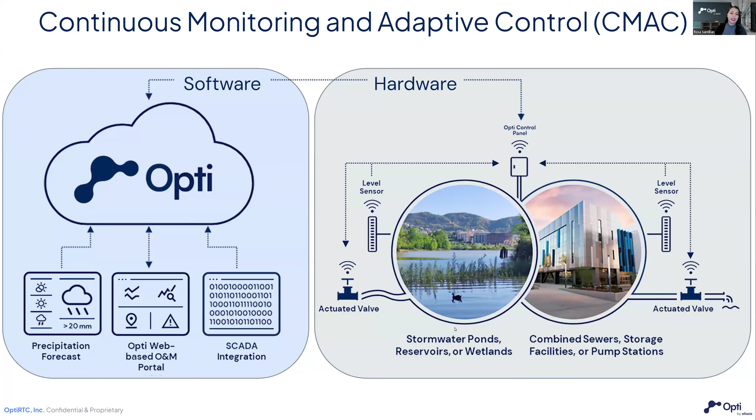And of course, we can't move on without acknowledging the challenges with the passive or traditional approaches. I come from a background in civil site design, and a big part of this was, of course, limited resources and budget, right? That's always super important. Adapting to a changing environment, we just talked about that. And once that punch list is a done deal, then there's also operation and maintenance that happens.

Stream buffers, I dealt with a lot of those as well, where you might have plenty of space, but then you have those 75-foot, 50-foot buffers that you just cannot disturb. Erosion control is another big deal. Let's not get into cost and disruptions, right?

That's another big topic. And then how do you know that your system is actually functioning the way that it was designed to function? You put it in the ground, and we all trust in our abilities to know that this system is going to be functioning the way it was designed for the life and safety of those around the system. So CMAC can certainly help with all these areas and potentially even more.

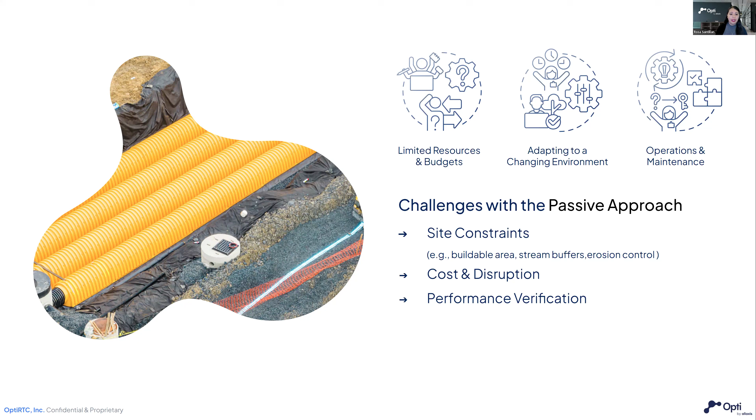It's, of course, a very animated graphical representation of this. So you have your valve that's controlling open, close. This could be butterfly valves or slide gates. You have your actuator. And all of this is hardwired into our control panel that we do have solar or line power. And then the control panel is communicating with the OptiCloud via cellular network in real time, as well as receiving information from forecasts. With all of that, the user can use a web-based dashboard to see real-time information as to how the system is functioning.

So again, going back to how is the system performing? And another beautiful thing about this system with CMAC is that it's fully adjustable. So we do have an optimization period, but then for the life of the project, the system can be adjusted again to that changing environment, whether it's above ground or underground, it works exactly the same way.

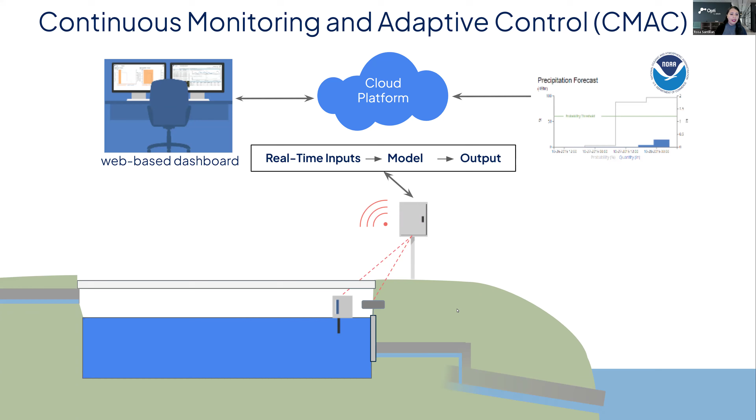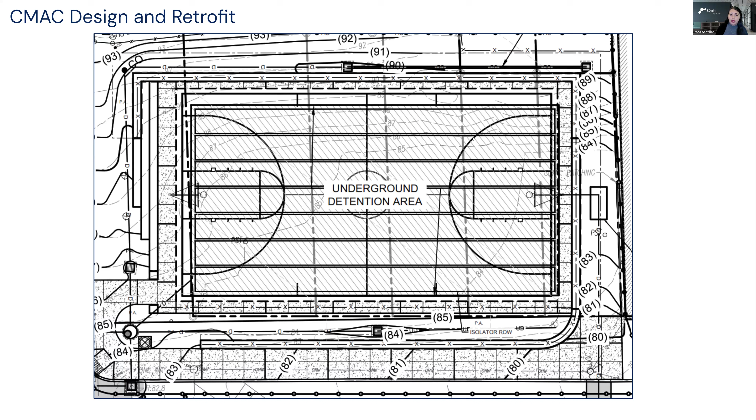This is a good example of areas where we typically see underground detention systems. This is directly from one of our ongoing projects where you see that there is a sports court. And underneath here, we have a series of chamber systems. This is an ADS StormTech MC 3500. And this can be connected, as with any other system, to your outlet control structure. And that is where we integrate CMAC.

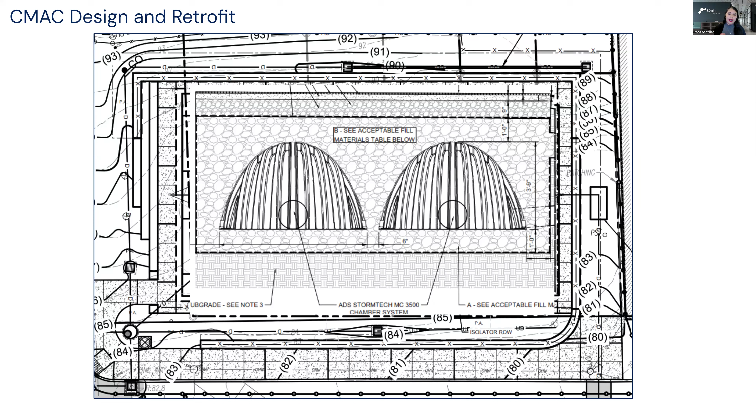So on the next slide, you'll see a very, very high-level annotation and markups, equivalent to maybe about a 10% design drawing set, where we're still trying to figure out where everything is going. We're still trying to figure out pipe sizing, where the outlet control structure will be placed, the sizing, all of that good stuff. So we work with the engineer of record to identify the best possible area for the control panel. Remember that that's part of the hardware. Where are the conduits coming and going from?

In this case, this project is a line power system, so we will be connecting to a nearby power utility cable there. So we work with the engineer of record just to lay everything out. And then as the project moves from 10%, 30%, 90%, up to 100% design drawings, it's fully customizable in terms of having certified hardware, but in terms of where the location of this hardware is best suited for the site.

In this particular instance, talking about constraints, we did find that the property line is about here. You can see my cursor there. And then we have a building that is pretty close to that property line. And then we have a wall that's going right up against there. Talk about site constraints, right? Everything will be housed completely in the underground outlet control structure. And then the only thing you'll see is a control panel.

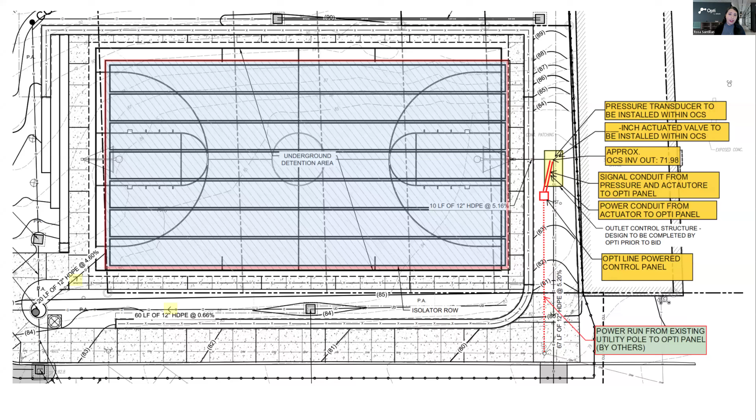And so again, we work with the design as it changes, as it shifts. If there's a change of scope, then we are part of that process the entire way. So that was a chamber system.

But if you can see here, again, this is a very graphical representation of where the Opti control panel and the valve would be installed. Here, you can't really see the leader there, but this is a 4-inch orifice. In the valve itself, we match it to whatever the orifice size is for the project. This is a vault system that can be used either for irrigation purposes, for attenuating and minimizing discharge, in a variety of other reasons that maybe we want to contain rather than infiltrate.

And we'll be talking about that more so when I hand it over to Dayton. He talks about the case study. But yeah, so you can house the entire system inside of the vault itself, and you'll never even know it's there. The conduits will come out and then they will connect to the control panel that many times is within the mechanical room where you house your water meters and whatnot. So the actual control panel can be housed inside of the mechanical room. No issues at all. We'll just find the placement for the antenna to make sure that we are properly sending and receiving signals from the antenna itself.

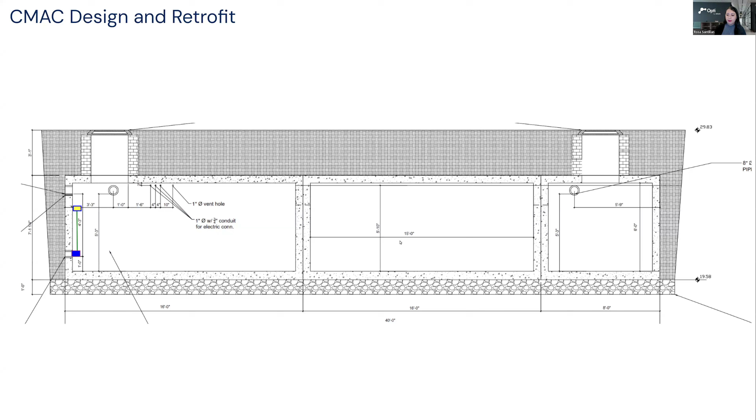And then here, I really like this representation because you can see that everything is there. You've got your valve, your stem, your actuator, and then it's just sending the signal to the cloud while on the surface level, you have all this beautiful usable space. And a lot of municipalities actually give you credit for using green infrastructure and maybe pervious and permeable pavers that infiltrate into your system depending on your design. But the Opti system itself is made out of those components: the valve, the stem, the actuator. The pressure transducer will probably be housed on this side of the weir wall. And then from there, everything is connected to the control panel and conduit can run wherever you need that to be.

Opti also, as you may have seen in previous webinars, supports our partners and customers with a set of design drawings. We're able to provide these in PDFs or CAD files as well so that you can customize your outlet control structure. And we'll work with you to verify that the setting is correct, that you're using the right dimensions, that we have the information needed to integrate the control settings, such as any elevations, if you have any weir walls, overflow weirs, any constraints within the outlet control structure. We'll work through all of that.

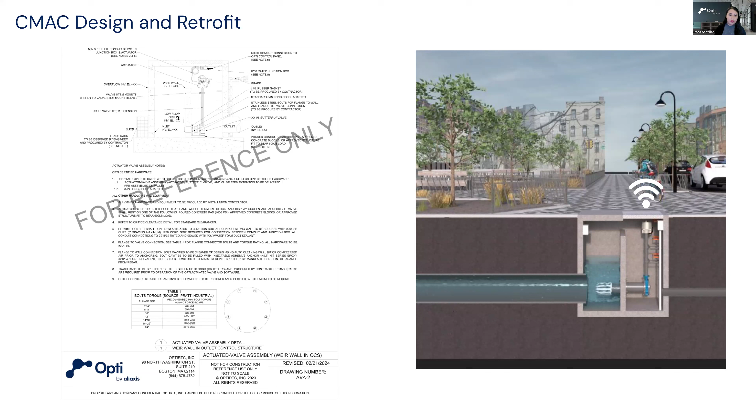And then this is one of my favorite parts. I'm not sure if anybody here in attendance was at CASQA just last week, but I think this is a national conversation that is happening around grants. So there is a lot of effort to provide grants at the municipality level, whether that's city, county, state. There's a lot of grants out there to be used. And during CASQA, we talked a lot about having multiple benefits, right? Stacking your benefits and having the best chance of getting those funds allocated for your project. And Opti can help you with that. Opti can be used for a multitude of benefits all at once.

And you'll see in this case study shortly, we talked about flood mitigation, hydromodification to reduce some of those erosive flows. That was such a big deal for that project. Water quality. You can also have other projects that might integrate water conservation, and the list goes on. So as we're moving into this era of more focus on stormwater management and having all of these wonderful grants available for project use, let's brainstorm and see how Opti can help you hit as many of those stacked benefits as possible when applying for grants.

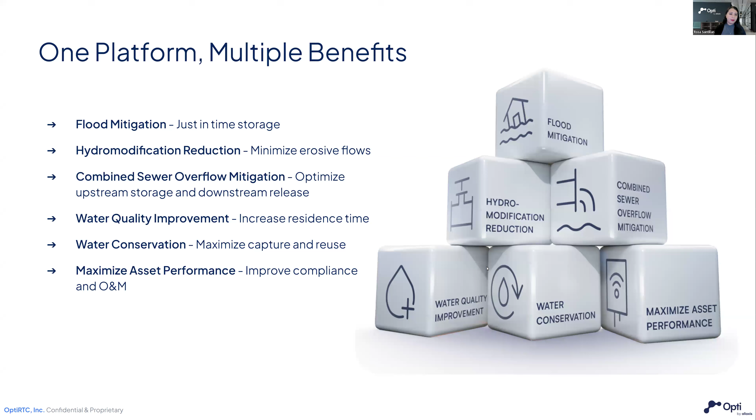And then here's a flow chart. Again, you may have seen this as well, but just want to reiterate basically the life cycle of how we get where we are. We identify the challenges, again, those stacked benefits. What are the challenges? And for every challenge, there's an objective. And then we can also identify some of the KPIs that go with that. We select the behavior on the control settings that are the inner workings of the system, the actual software. We also establish those key parameters. How do you want the system to function? And Dayton will go more into detail on that for this particular case study. But do you want the system to hold the stormwater for a certain amount of time, 4 hours, 5 hours, 24 hours, whatever that is?

And then slowly release for water quality purposes. Whatever that is, we identify those KPIs during this stage, and then we go into H&H model and simulation, which Kenneth Yu from Opti, our hydroinformatic engineer, went into a lot of detail on in seminar number 2. So if you're interested in learning more about these simulations, I refer you over to that seminar, and he goes into really, really good detail. And if you have any questions, please feel free to reach out and see how we can partner with any models that you may already have in your design.

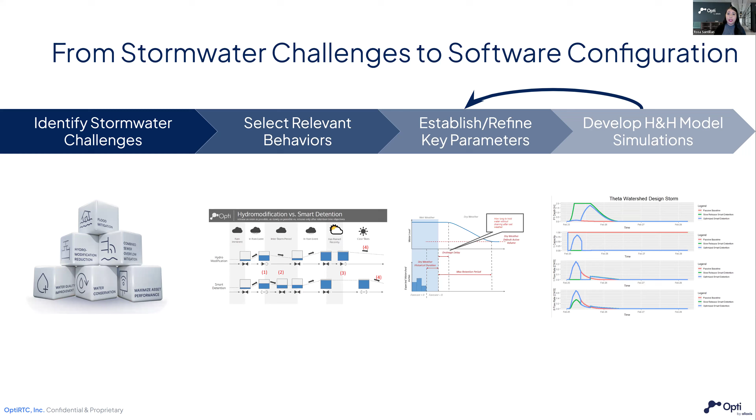And then finally, top priority here is security, right? How do we make sure that our systems are safe, that they are reliable? And of course, redundancy, right? That's part of every engineering project. We make sure that the civil design is there. So we do not necessarily replace, but rather enhance passive overflow that's been designed by the engineer of record during a passive system. We simply enhance the design.

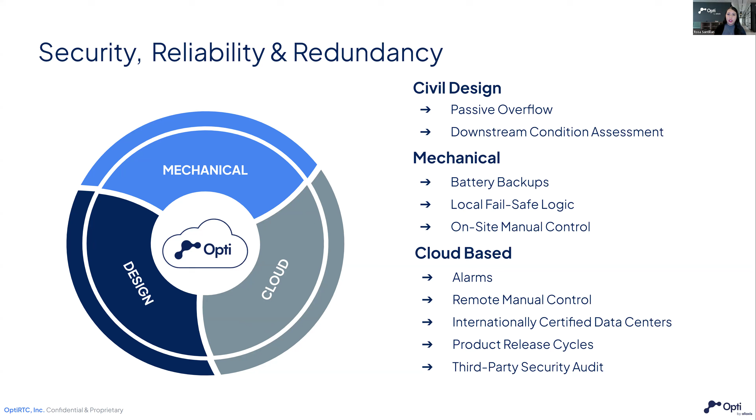We also do downstream condition assessment, and we can do that during the feasibility assessment. We provide mechanical and cloud-based security as well, and we can go into more detail on that in future seminars. But we just want to make sure that we are providing our partners, our customers, and the end user with that peace of mind that we do have a set of security, reliability, and redundancy practices in place.

And then, of course, we talk about this every time, but we are growing as more and more projects are coming, but we're already in over 300 different deployments. We are backed up by a variety of different regulatory approvals. And again, going based on those grants that we talked about during CASQA and other national conferences, we are part of that conversation. We are at the table learning more about how we can support these efforts as a whole. So we're currently in 37 states and growing. So love to hear about where your projects are.

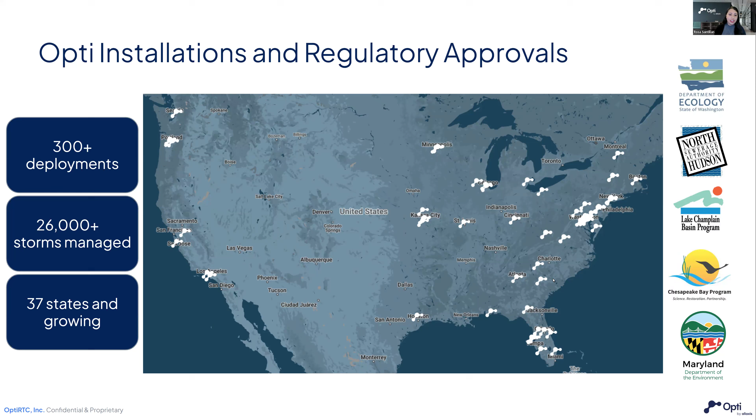And yeah, let's talk. Partnering for success is also our top tier priority here, right? We partner with you so that you can provide your local expertise. You know your state, you know your design. Let's talk, let's brainstorm, let's share models and design. And we also provide you with a lot of support from start to finish, and even through O&M, operations and maintenance, with our Opti technology. And then together we can just work towards that common goal of providing clean, water resilient communities with that peace of mind.

And with that, I'm going to go ahead and pass it over to Dayton, where he can talk more about the Sand River Stormwater Project that has been a wonderful success. And I'm sure there's a lot of you here in attendance that might have had some part to play. So thank you, everyone. I'll go ahead and pass it over to Jason and Dayton for this.

Great. Thanks, Rosa. Appreciate it. Jason, good to see you. Welcome. Good to see you again, Dayton. It's been a while. Yeah. Appreciate you joining us. I'm excited to talk about this project. Excited to talk about it with you.

This is one of my favorite Opti projects that I've ever done. I've done a good number of projects over the last 7 years or so. Definitely one of my favorites for a couple of reasons. One, you put together a great project team. They're very smart, capable, enthusiastic. Two, we have some slightly complex control logic, which you'll remember in the design process made this a really fun project to do. And three, it just provides a ton of value for the community. And you're close to this, you're local, you've seen a lot of this. So I'm excited to jump into it. We'll share with the community a little bit about the project, how we implemented it, and have a good conversation. Great.

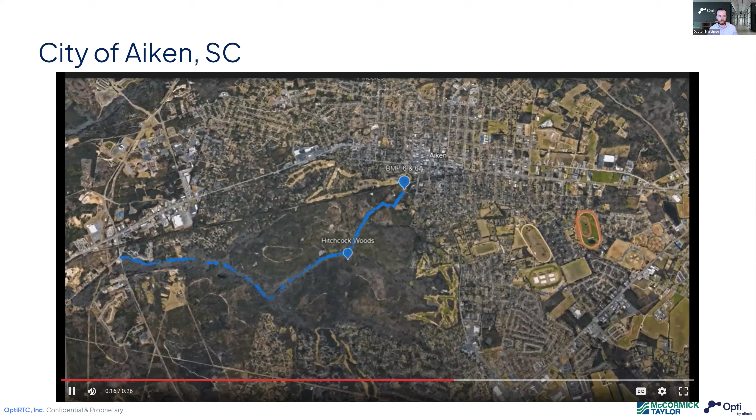The equestrian community, still today, they use this amenity, Hitchcock Woods, significantly. They spend their time hiking, riding horses in there, and it has running through it, which you can see, the Sand River. So Hitchcock Woods, the Sand River. Here's a little sneak peek at where the project we're going to talk about today is. It's right at the headwaters of the Sand River, right where basically the urban downtown area meets up with Hitchcock Woods.

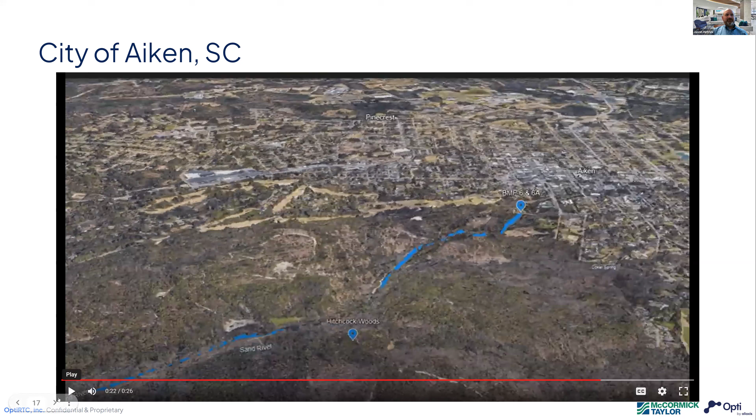Anything else you want to add about the city? No, you nailed it on the head. Aiken was born as a winter playground for the New York City elite. They would bring their horses and friends down for the winter and go do fox hunts and equestrian activities. And also, it was a major hub in the railroad system from Savannah and Charleston up to the inland area. So kind of a dual birth to Aiken, the railroad and the equestrian community, and Hitchcock Woods is a huge gem of the city of Aiken, and was kind of the impetus on this project on preserving the jewel that's in their backyard.

So let's talk a little bit about that impetus real quick. So the Sand River, which used to be, as I understand it, a small, narrow river that someone could hop from one side to the next. Is that right? Correct. Yeah. So the gentleman there in the middle, his name's Bennett. He grew up in the woods, and he manages the woods. And he remembers as a child, not that long ago, that you could just hop over the Sand River. It was a little babbling brook, creek. Some of the older members of the woods would just skip over it, and then the last 30, dating myself here, probably the last 50 years, the acceleration of erosion has just been exponential due to the increased impervious area within the 1,200 acre watershed.

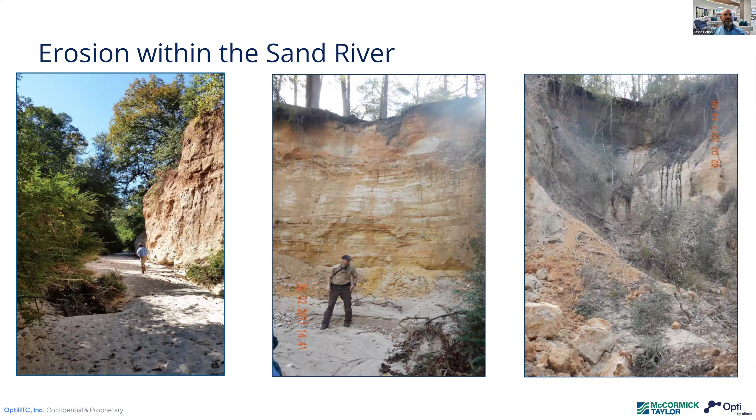I will say some of the impervious area and some of the pervious area upstream is actually pretty exciting, Nick. They've got their nice downtown walkway, their sort of outdoor shops and restaurants. It's a very fun place to be, but I know it carries with it some consequences. Correct, and actually, the runoff would probably be 1,000 times worse if it wasn't for Aiken's Parkway system. They have large, broad boulevards with treed and grass medians, a lot of tree canopy in the watershed, which does help. But as you can see from these pictures, it doesn't do enough in mitigating the runoff from such an urban area.

But Aiken and the community there, they decided to do something about this, right? So they formed the Sand River Stormwater Task Force, which you were a key part of. Correct. Just prior to our involvement, Mayor Osmond in 2016 formed the City of Aiken Stormwater Task Force, which was comprised of members from the Hitchcock Woods Foundation, elected city officials, city DPW folks, and also residents of the community. Aiken is special in the fact that it sits adjacent to the Savannah River nuclear site, so it has a good clientele of engineers and scientists that call Aiken home, and those folks were part of this task force. So we were able to have really constructive scientific dialogues in developing the ultimate strategy to address the erosion within the river. And that was the big focus, right? What can be done to address that erosion.

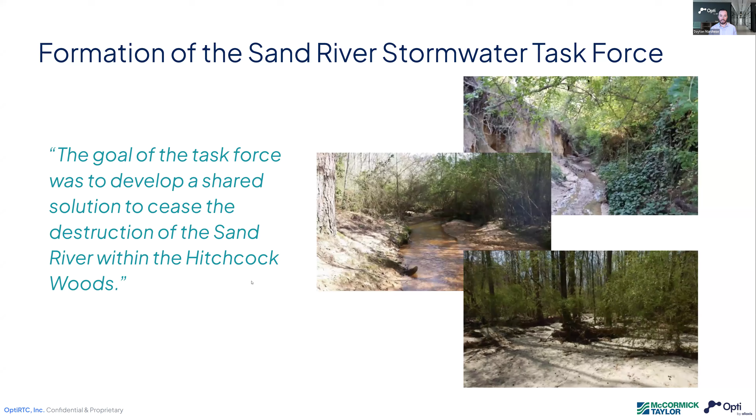And McCormick Taylor was deeply involved in the technical side, right? You did the modeling for this, you broke down the city into these different sub-watersheds. Correct. Yeah. So the 1,200 acres that drain to the headwaters of Sand River arrive at the Sand River in two large sub basins. You can see here, one to the west side of the city, that is the historic downtown area that gets to the Sand River very quickly. And then to the east side of the city, there is a much larger, broader drainage area that consists of several sub basins that makes its way there.

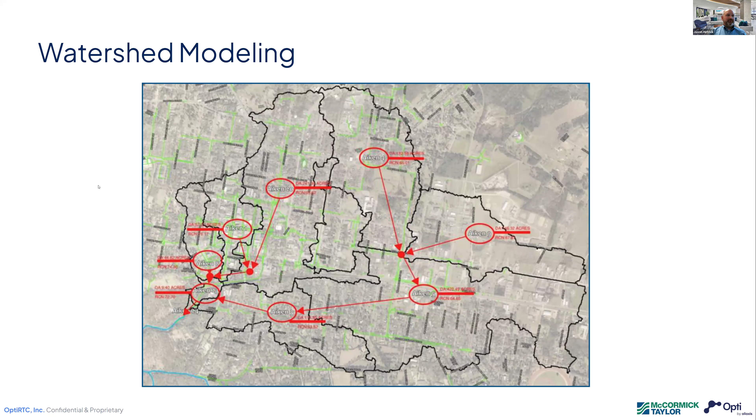And we did traditional hydrology for the basins using TR20 to determine what the runoff was coming into the area, and also what it would be if Aiken wasn't there, if it was just the pine forest and the sand hills of 200 or 250 years ago, before Aiken became Aiken. And so the team really had a goal of restoring this pre-development hydrology and managing the 10-year storm.

So you did the modeling, you identified the drainage areas, and you identified a target storage volume that would be needed in order to mitigate that 10-year storm. Correct. So we looked at various storm events, trying to figure out what would be the most practical, plausible, and cost appropriate management storm to look at.

As you can see here, if we're going to manage the 1-year storm back to pre-existing woods condition, so wiping all the impervious area out, and what would be the runoff if it was the forest, it was still a sizable amount, 26 acre feet. We looked all the way up to the 25 and 50-year storm, which didn't make this chart, and what we ended up going with was the 10-year event.

One, because that's the common metric for new development in Aiken in South Carolina, managing the 10-year back to the pre-development conditions. And also it gave us a volume that we felt was plausible to achieve, and that we could meet that goal, and then look beyond that in the future, for future projects.

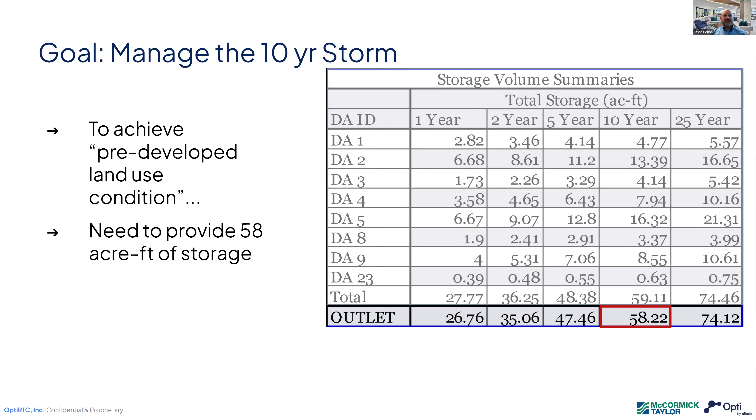It's not easy to find 58 acre feet of storage sitting in an urban area of Aiken, is it? Yeah, so that quickly proved to be a challenge. Like I said, Aiken is a historic city, very built out, not a lot of publicly owned open space available, and if it was, it was heavily treed. Aiken is a tree city and they hold their trees quite dearly. So even if it was a publicly owned lot, most of those lots were excluded due to the grand live oaks and other very grand trees growing there. So that's when we started to look for alternatives.

But the team did identify approximately 20 projects, right, that could meet the 58 acre feet, not inexpensive. Yeah, so you can see on this map, we started out with probably 50 conceptual locations, and through ground truthing and doing some preliminary design, we quickly pared that down to 20 locations that would get us to the 58 acre feet, all on publicly owned right of way, whether it be school locations or roadway right of way, public parks, that sort of thing.

And it got very expensive, not only for the construction, but also for the long-term maintenance that the city would have to endure, maintaining 20 stormwater facilities scattered throughout its jurisdiction. Yeah, that's something that's not always considered when looking at some of these watershed plans, so it's good you all included it. But two of these projects jumped out as being the largest, right here at the headwaters.

Yeah, so at first, common stormwater metrics today is we don't look at end of pipe treatment options. We try to put the treatment options throughout the watershed, which, as you can see here with the 20-some projects, was our first approach. But when we started looking at the cost, the maintenance, and the time frame needed to actually implement and build these projects, we quickly realized that we needed to look at an end of pipe treatment system where we can get a very quick return on our investment and make a sizable dent in that quantity management that we were projecting to do.

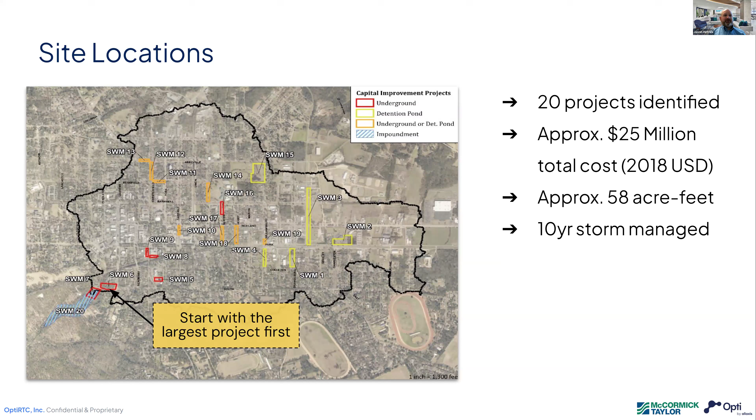Which brought Stormwater Management 6 and 6A to the forefront, located right at the terminus of the storm drain system. And we have a picture of the design of that, and maybe you can walk us through this in a minute. This isn't exactly what I'll call a more traditional passive design. This was the design that you did that included real-time controls, which is what we're going to talk about. But maybe you can talk us through the flows, where water's coming from and going in the system.

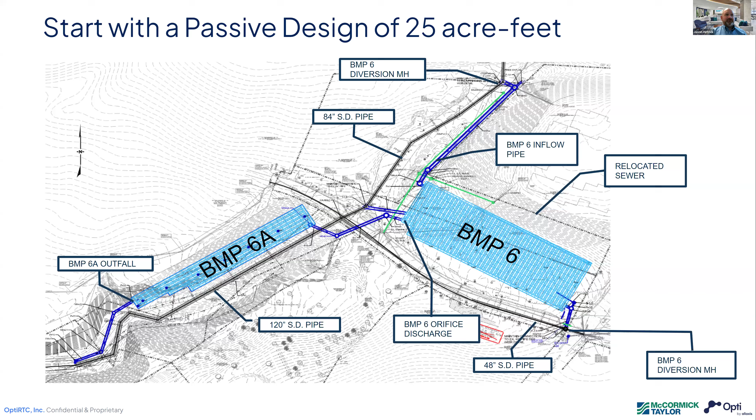Yep. So we were constrained by property footprint, and also we've utilized this was a StormTrap double vault, which at the time was the largest concrete vault system on the market, a 15-foot internal clearance. We could not squeeze any more storage out of these sites. And as you can tell on the previous slide, the 1-year storm management was 26 acre feet. So by itself, without Opti, we would be passively managing only the 1-year storm event, and as a detention facility, not as an infiltration facility, which Opti allowed us to do. So those were some of the site constraints.

Given the site constraints, space, property ownership, elevation, you and the team were looking at optimizing it. So that's when you engaged Opti to look at a continuous monitoring and adaptive control, or CMAC, or real-time control solution. And from a hardware perspective, this was relatively straightforward. You designed 36 by 36 inch slide gates to go on the outlets of both BMP 6 and BMP 6A.

Correct. And the question might be, well, why did we pick 36-inch by 36-inch? And one of the benefits of the Opti system is that the slide gate can be incrementally adjusted from basically a ½ inch up to full open. So that allowed us to have maximum control of discharge out of one vault into another vault. We were confined to 36 inches because that was the maximum opening StormTrap would comfortably allow in their precast vault panels due to rebar and reinforcing issues.

And also a slide gate any larger than that would be quite intense to install and maintain, and would require quite a motor system to raise and lower. So we went with the 36-inch vault opening just to make sure we could maximize the dynamic flow coming out of the systems from practically nothing to full blast.

Yeah, that's the great thing about this, is for really large storm events, we can open these gates at the start of the storm, let that initial flow go through, and then close them off so we can capture the peak and then hold that water back and infiltrate it. So to your point, it's dynamic.

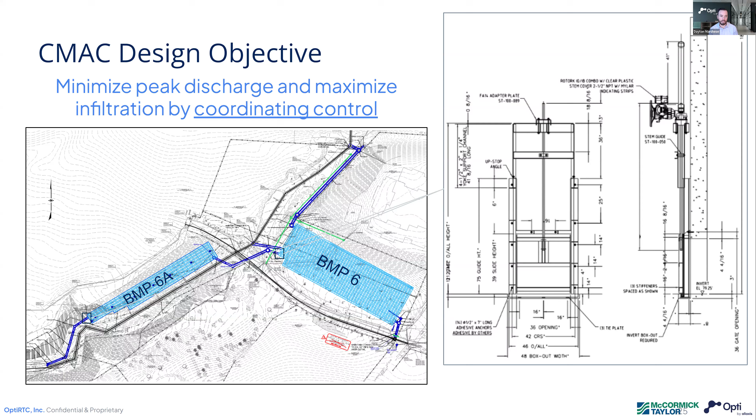We talked through the civil design considerations. So you were the lead civil design. We talked through the existing conditions, drainage area, storage capacity, the 25 acre feet, controllable volume, so it's controlling the whole thing, cellular connectivity, power. These are both line power systems. So you designed a power drop on site. And then of course that overflow you called out. And these are just some of the considerations that we go through for these design projects to make sure it's both meeting the needs and also being safe and covering everyone's bases.

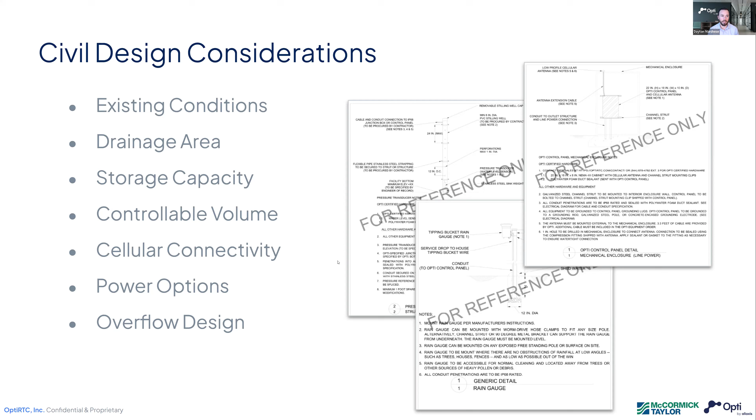So I know you mentioned the elevation challenges. So we put this on here to give a little bit more scale to those elevation challenges. So this is BMP6, which is upstream, which flows down, enters that pipe, and then goes into BMP6A, which is downstream. Yeah, there's approximately a 40-foot elevation difference between the bottom of BMP6 and BMP6A. There's huge topography change over the site, which created a challenge in conveying the flow from one vault to the other.

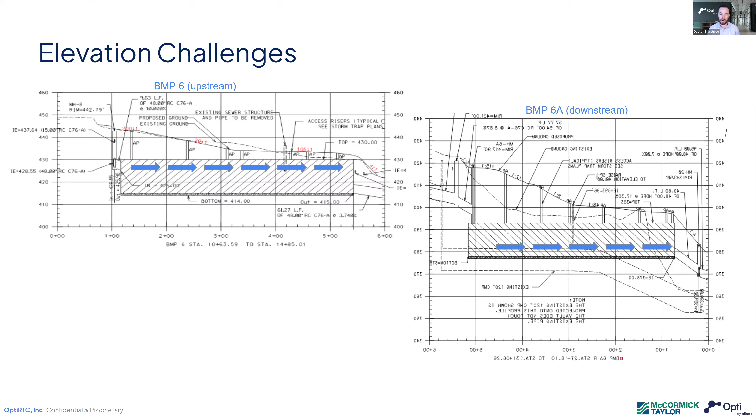And as Peyton will get into shortly, it is also how to sync the two Opti systems together so that they're integrated in parallel or in series. And that's the takeaway. We can't operate this as just one hydraulically connected system. We couldn't just put an outlet gate on BMP6A and hold water back and utilize the storage volumes in both systems. We had to put 2 control gates on there and then coordinate them together. So that took some simulation.

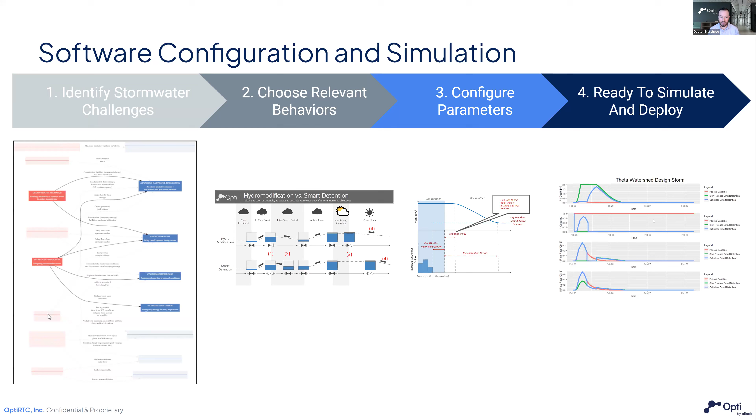So first we identified the stormwater challenges together. We chose the behaviors. So we were trying to target reducing peak discharge and maximizing infiltration. Those are the 2 primary hydraulic goals of the system. We then configure the parameters and then we simulate it. I remember this, this is generally what we came up with. This is an illustrative example of how the system was going to operate. We broke it down into 3 components.

So how is the system going to operate in small storms, meaning less than the storage capacity of BMP6A. And what we've said is this system is going to pass flow through BMP6 into the downstream BMP6A, which is then going to hold it throughout the storm and then infiltrate. And can you remind me, why did we pick BMP6A as the vault that was going to be used primarily for these more frequent small storm events?

So BMP6A sits right on a lovely layer of prehistoric beach sand. So the infiltration rates were around 17 inches per hour. It just had a very high infiltration rate. So we wanted to maximize the amount of water being pushed into 6A, capture it so it would infiltrate. It was infiltrating a lot quicker than 6 was, which was sitting on a kaolin clay layer.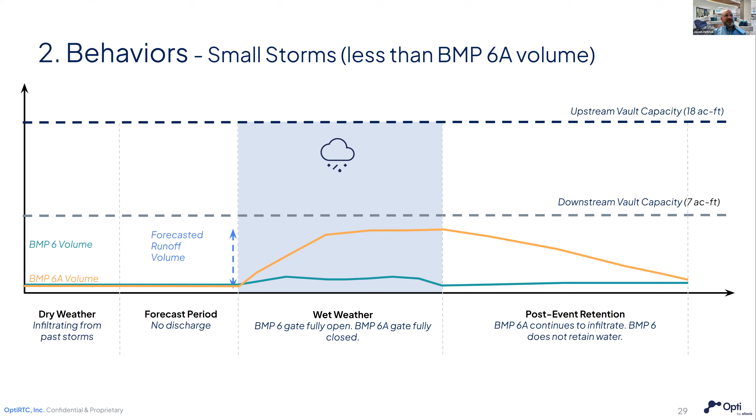To access the subsurface sand layer where BMP6 was located, we actually installed 25-foot deep stone chimneys that were about 4 to 5 foot in diameter throughout the footprint of the vault. So while 6 infiltrates, it infiltrates at a much slower rate than 6A. So 6 is the shock absorber in the system, so to speak. It collects all of the runoff and then meters it out to 6A as 6A infiltrates. So that's what we're doing for the small storms.

And then the medium storms is similar. So these are storms that will fill up 6A. So first we let 6A fill up, and then when it's full, the gates at 6 close, and then we start to fill up BMP6. At the end of the storm, these are both relatively full, and then they hold water and infiltrate.

And then finally, we broke it out into large storms. So these are storm events that are greater than the combined volume of both vaults. And for these, we want the gates of both systems to be open at the start of the storm to pass that slower flow before closing off and then retaining water. And then at the end of the storm, both are full before they infiltrate.

And that was a really important aspect of the design, because the receiving stream is a sand-based channel and it erodes very easily. So to minimize the erosion, we really wanted to capture that peak runoff event coming from the storm event, the most destructive amount of erosion. So we were willing to let perhaps that water quality first flush bypass through the system, because that was going to do the least amount of damage to the sand channel, and then shut the gates so that we can capture the most destructive part of the storm, so to speak, and mitigate the erosion downstream.

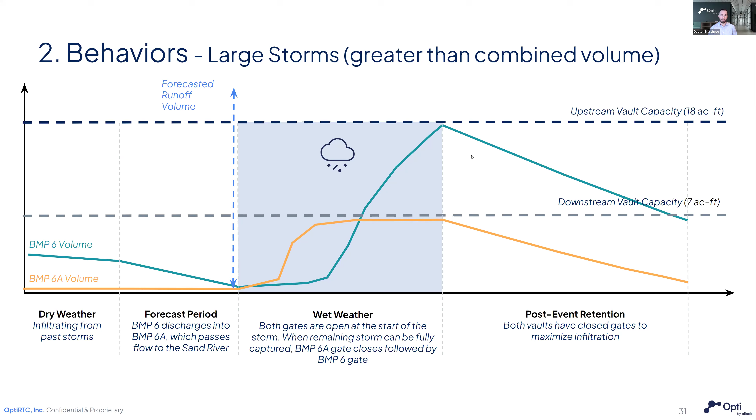And there is a little bit of depth inside both of these vaults between the invert of the gate and the vault bottom. So there's a little bit of capture there, but you're right, we wanted to push that early volume through. So we did some configuration. Here's a list of some of the parameters.

I think the biggest takeaway for this, and what's very exciting in my mind, is this represents a paradigm shift from the traditional engineering approach, which is model, maybe monitor, design, build, and walk away, to, well, now we can model, we can monitor, we can design it, we can build it, and then we can observe how it's performing and then make some adjustments to the control parameters. That's during the optimization phase.

So after we turned the system into automatic mode, we were watching it very regularly to see how it was performing to these storm events, whether it was getting more flow than expected or less flow than expected, or whether it needed to be more or less responsive to the weather forecast. And these were parameters that you and I and our teams were going back and forth on throughout the early phases of the project. And it's exciting because now we have it dialed in pretty well, but there's still opportunities to adjust it.

Yeah, one of the most challenging things of the Aiken topography is predicting the hydrology and the runoff through that watershed. Aiken has a very unique soil complexity. Some areas are sand, some are clay. It has a very disconnected drainage system. So there's been countless hydraulic models done on this watershed, and each one came out with a different result. So it's like, what do you base your design on?

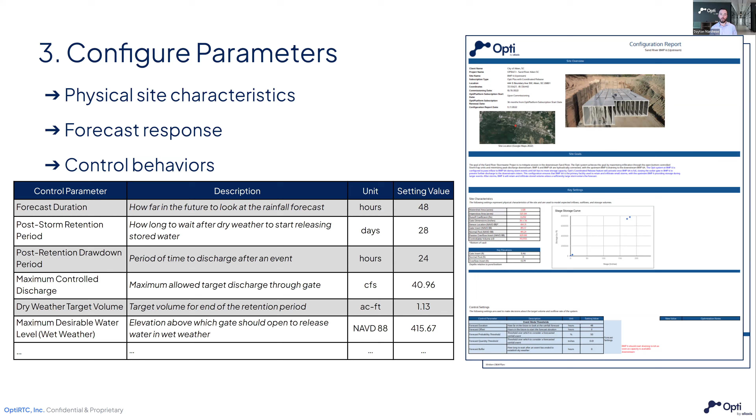So using the Opti system, we're actually able to calibrate and base the design on real world results instead of a model that could potentially be quite wrong. Right. And update it as we need to. If the upstream urban area changes or regulations change or any changes in frequency of rainfall patterns, those are things that can be incorporated in the control logic in the future as needed.

So here's some of the simulation results. This is what you and I came to. You modeled the system. We added some Opti control logic and saw that we were getting anywhere from a 2 to 3x increase in wet weather volume capture, which is the amount of stormwater kept out of the downstream system during that critical wet weather window. And we're also seeing a significant increase in infiltration because the system is now able to capture and fully infiltrate the more frequent small to medium storm events.

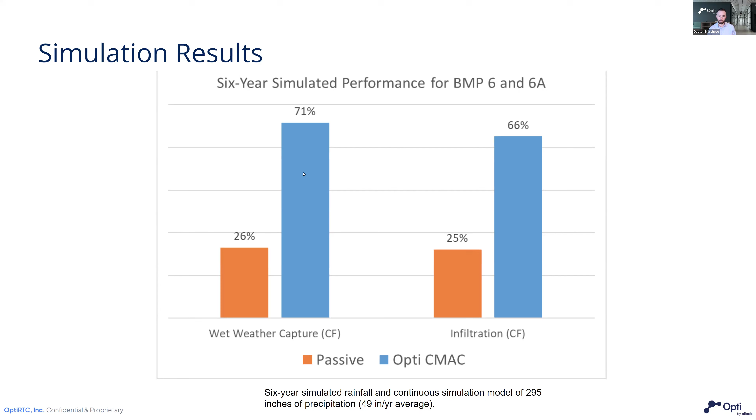We have some images. Some of these I think came from your team during the construction. I love showing these. It shows the scale of what you are working with on site. So that's BMP6, the upstream one. This is 6A, right? So we see the crane here for scale. I think we have a couple more to share. So this is another one for 6A. Let me look at these. We have the people on there, and then this is one of my favorite photos of it.

That's BMP6 right there. Makes the large tractor trailer look like a Matchbox car, and each vault piece could fit one per trailer on average. So we had over 1,200 tractor trailer deliveries to this site. Yeah, this was StormTrap. So they've got their vault system on there. It was very exciting. But yeah, the logistics of trying to get all of those truck pieces in there is almost a project in and of itself. It's pretty tight.

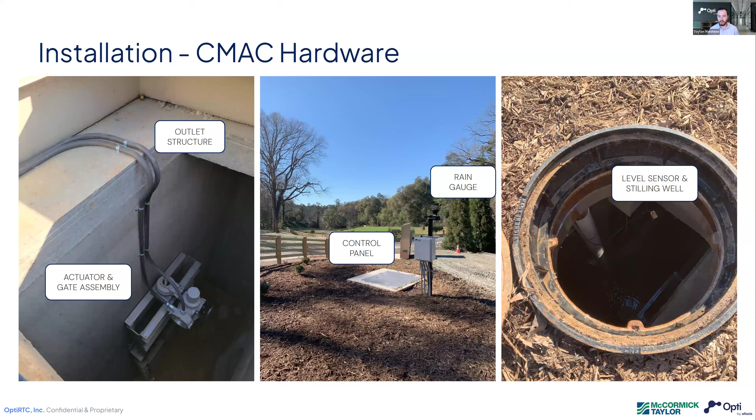Yeah. So we have some pictures of the control hardware. So this is a top view of the actuated gate, the actuated gate assembly within the outlet control structure. There's a control panel. It has a cellular antenna on it, so it's reporting up to the Opti software platform. A rain gauge on site, power drop, and then a level sensor in the stilling well.

So here's some photos from the completed construction. What's the park used for now? So surprisingly, it's very well used. It's a passive park, has some pervious walking trails, pathways through it, native landscaping, a rain garden. It provides a connection from downtown Aiken to the entrance to Hitchcock Woods. So there's a lot of pedestrian traffic, grabbing lunch and then going to take a walk through the woods afterwards. So just general recreational activities, nothing structured.

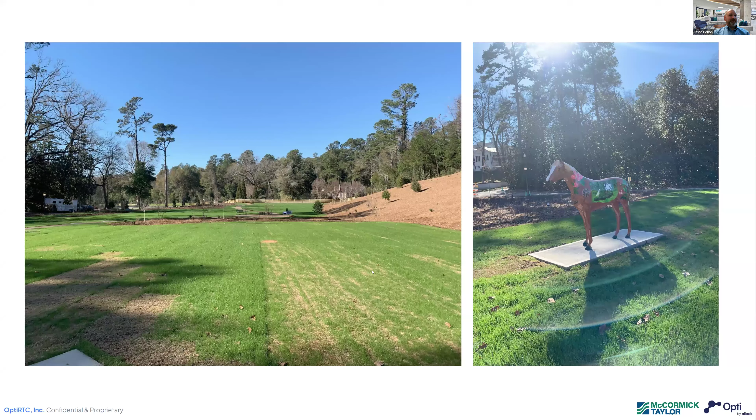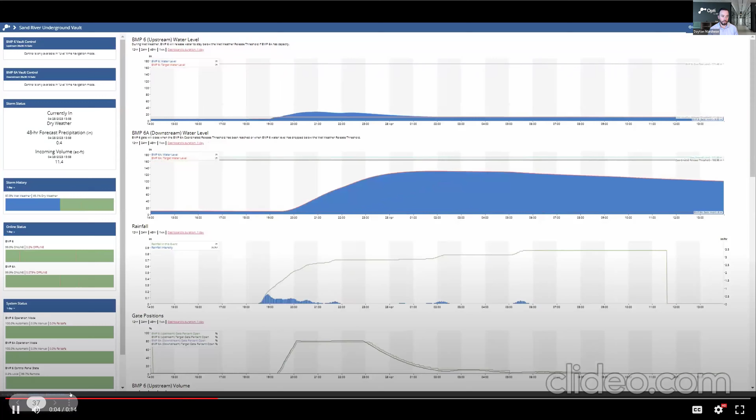Let's see, here we go. Yeah, so this is actually 2 back-to-back storm events. So first storm comes in, about almost a 1-inch event. Water passes through BMP6, the upstream one fills up the downstream one, and then fully infiltrates. So in this interstorm period, the gate for the downstream BMP6A doesn't open at all, and it's infiltrating this volume.

Then the second storm event comes in, over 1 inch, starts to pass through the upstream BMP into the downstream BMP until the downstream BMP is full, at which case the gates for the upstream BMP close, and then the upstream BMP fills up. So this is the system working and coordinating together to say, let's try and pass flow into the downstream site as much as possible. Unless it's full, then use the upstream one.

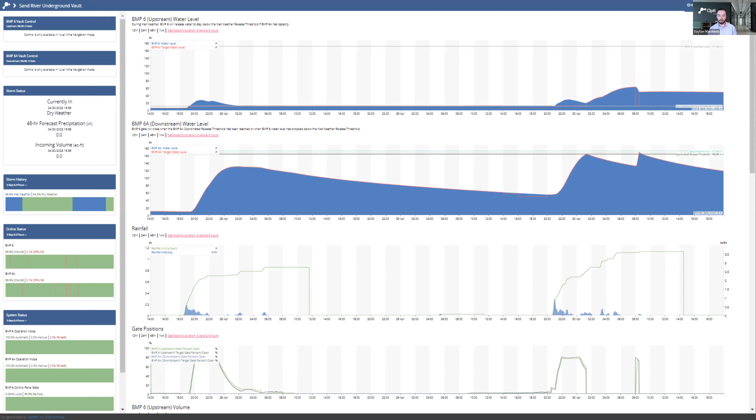And we can see that the downstream BMP is actually infiltrating volume from a past storm event before this first storm event comes in. And then the system clocks that there's not going to be enough capacity in both systems. So the downstream BMP releases water into the Sand River in advance of the storm during dry weather. System fills up, triggers the upstream BMP to close, and then we're utilizing the volume from both sites.

And then the other thing is these systems are full before this last storm event comes in. And we see the downstream BMP automatically opens in that dry period again to create some additional capacity.

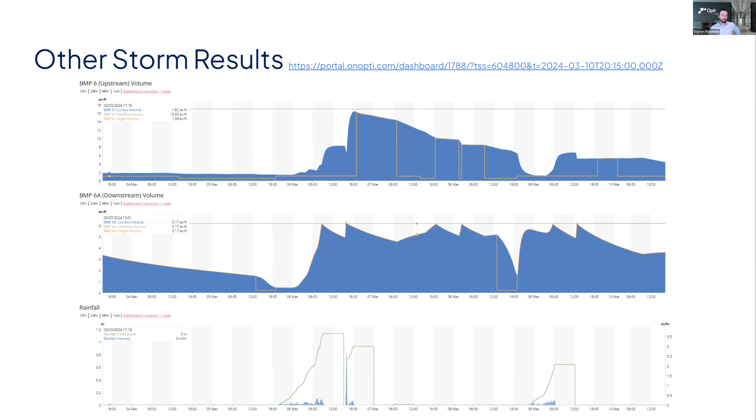So we talked a little bit about the infiltration rates, and we looked at a couple of different storm events for both of these BMPs, and we thought this was a fun thing to share. So for BMP6, and I think this mirrors what you were mentioning earlier, Jason, BMP6 actually has good infiltration rates compared to any other general stormwater project. Now that you put in those stone chimneys, it's getting anywhere from around 1/2 inch to maybe 2 inches per hour, a little bit more at higher elevations.

And then BMP6A is around 2 to 3 inches per hour for most elevations, a little bit more when we get higher volumes in these systems. And is this about what you would expect post installation?

Yeah, I'm really happy with these sort of infiltration rates, especially when you're considering the amount of construction equipment that we're sitting on top of this material to create a gravel sub base, a crane sitting on it. The contractor tried their best to minimize compaction, but at the end of the day, it's really hard to prevent that. And so I think anytime when we have over an inch of infiltration rate in the stormwater industry, we're happy, especially when you get to 2 to 3 inches.

So this really does make a huge impact in reducing the amount of runoff that's running into the Sand River every rain event. And what's great is we're going to be able to track this over time also, so we can see if there's maintenance required or any other needs for the site. Yeah, I mean, the biggest takeaway is that most average rain events that we get, we're able to capture 100% of that volume and infiltrate it.

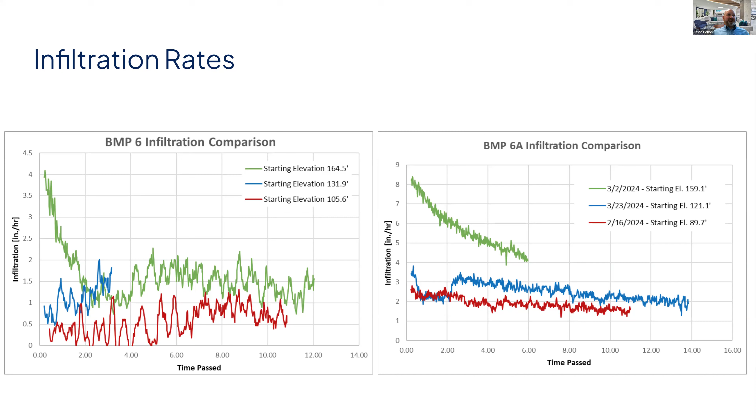Yeah, so we wanted to revisit this, given that the site is working, it's working very well, it's capturing more stormwater than originally expected. Does that mean that this watershed plan will then be updated, where maybe the least cost-effective projects might be reconsidered, since the city is able to meet their goals better with fewer facilities?

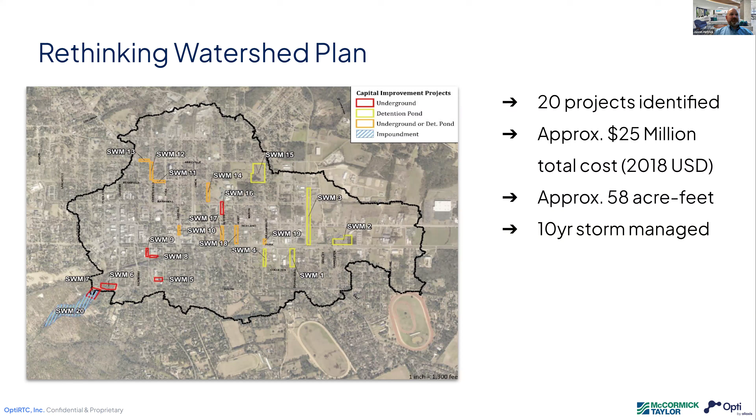Yeah, 100%. At this time, there's really no need for the city to move forward with any additional projects. The Opti control system is basically creating the same result, if not better, than if all these additional 20 projects were implemented. So we were able to basically tackle the problem with one project instead of 20, save the city at least $10 million, if not more, considering we're now in the post-COVID era with inflation and everything. So probably $15 to $20 million cost savings in reality by just implementing one CMAC control project.

So I think that brings me to the takeaway. So you said, offset the need to spend millions of dollars. And the thing is, the city still can go spend that money, but it might be on public amenities or additional parks or other facilities or benefits to the community, because they're able to get the increased stormwater performance from this project, protect their critical resources.